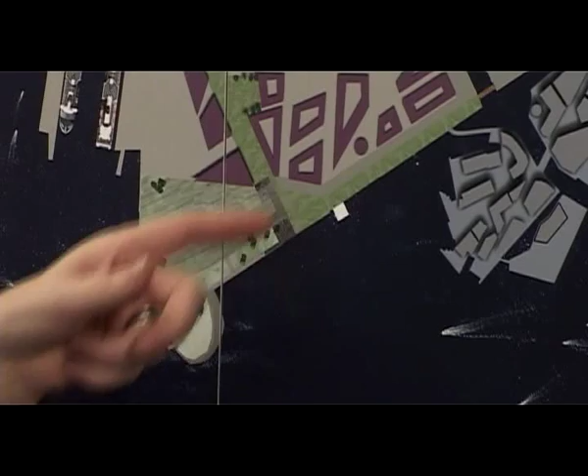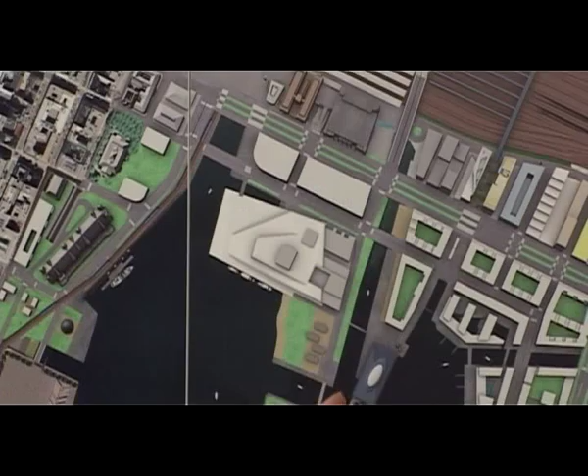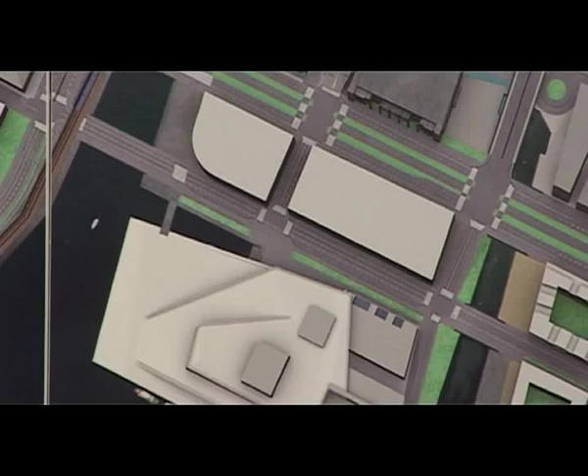A main characteristic of Oslo is also the points of land that stick into the fjord, like points of departure into the sea landscape. We are talking about a national axis of culture running from the Park of the Middle Ages, where we hope the University of Oslo will also locate a museum for the university. On the eastern side of the Akerselva River, we will reconstruct a new Munch museum, and on the other side of the river, we will have the new public library of Deichman. We are also very happy to already have the National Opera and Ballet, located and designed by Snøhetta, in this area. The main idea of the Opera House project, in the setting of the harbour in Oslo, is to transform a site which was closed to the public into an opera house which doesn't close it even further, but again opens it and gives the site back to the inhabitants of Oslo and Norway.

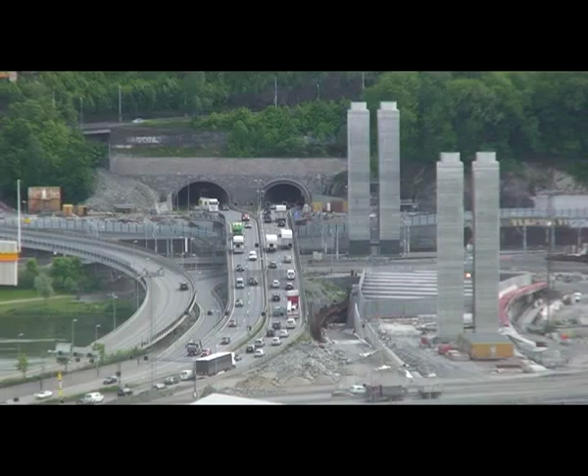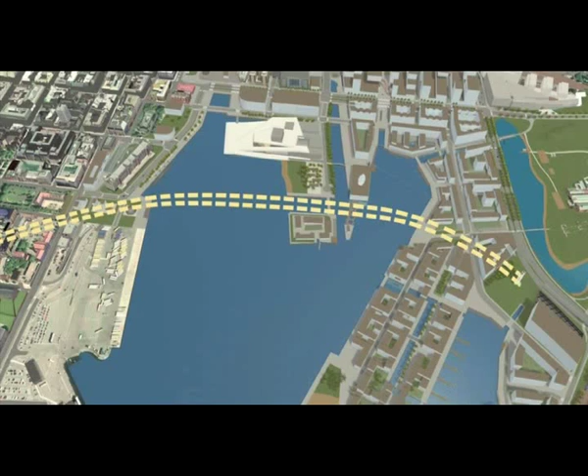The project will basically develop a central area of Oslo by realigning the existing motorway, which goes along the surface, along the fjord, down into a tunnel. We had certain choices to connect up these existing tunnels: a bridge, an immersed tunnel, or a rock tunnel. A bridge would naturally block out the fjord and dominate the area. A rock tunnel would be very deep, because the depth to rock in this area is 50 to 60 meters. So the immersed tunnel was a natural solution. When completed, it will be underneath the existing seabed.

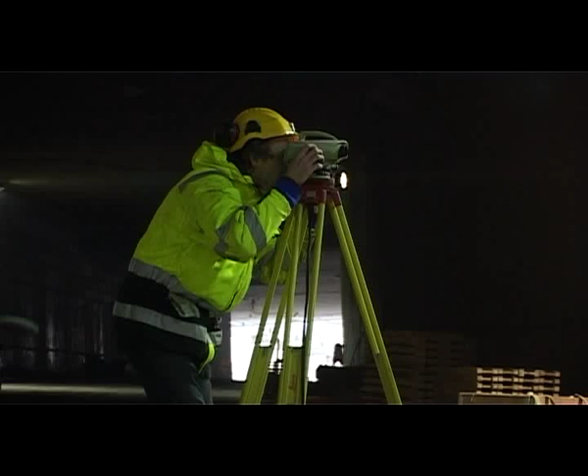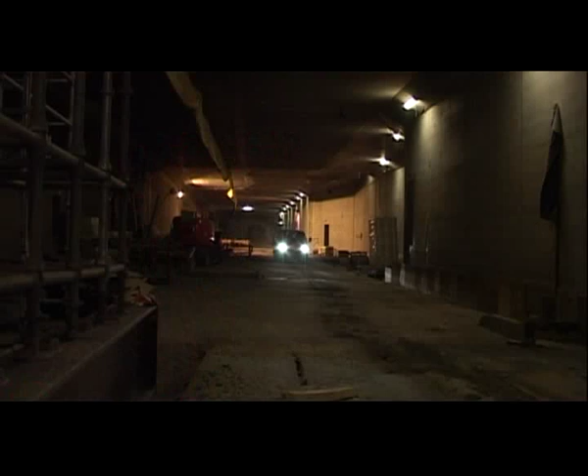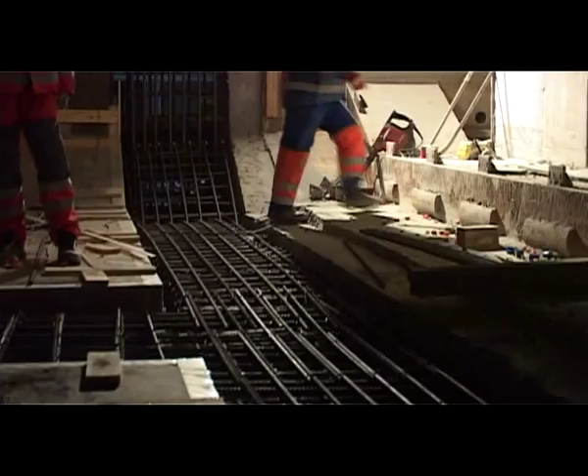We're now standing approximately 20 meters below sea level on the joint, the element joint between element number 4 and 5. From here, we have about 300 meters of tunnel in both directions. We're standing here on the joint. When the elements were immersed, there were bulkheads on either side. These have been removed, and we're now completing the structural concrete in the joint section all the way around.

We expect to find certain archaeological artifacts, because Oslo is 1,000 years old, and we hope to find interesting things. We have found interesting things. We expect to find things maybe from the Viking period.

The most important part of the artifacts are the Viking ships. It's right here under the hills of Ekeberg. We are planning to locate the museum, and our goal is to be able to display the artifacts right here in a medieval context.

One very important issue with the Opera House is that it actually falls into the water level—it dives into the water, which means you withdraw from the normal barrier between horizontal urban ground and the water level. So the building will hopefully enhance the use of water in a very close and intimate relationship between land and water.

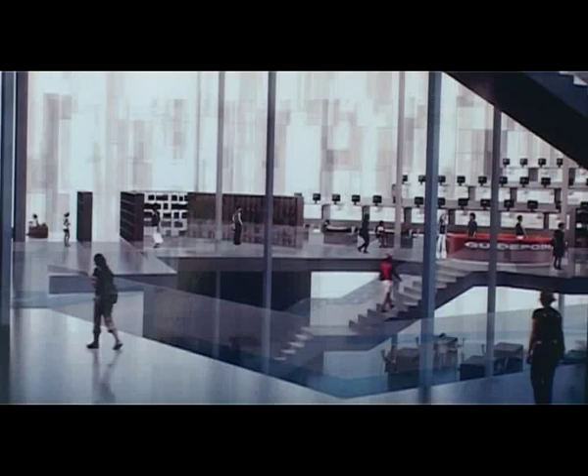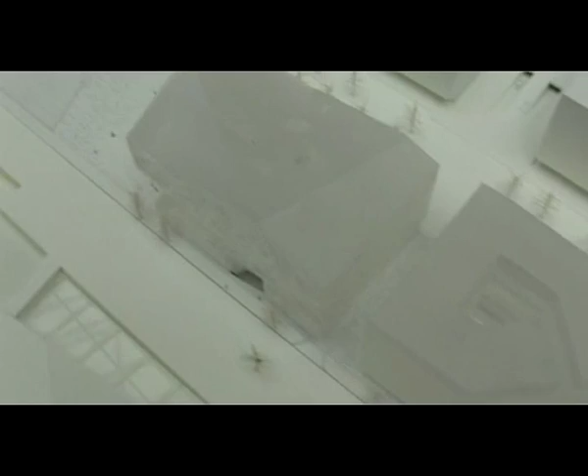I'm representing the company Lund Hagem Architects, who together with the architects of Atelier Oslo won the competition for the new library in Oslo, which we are very proud of, and we think this can be a very good building. When we turned in our project, we called it Diagonale.

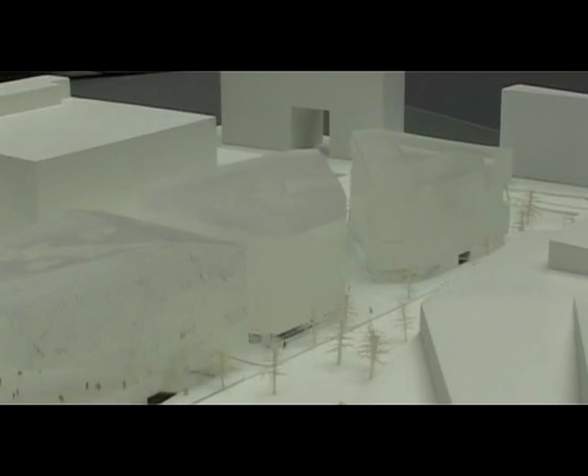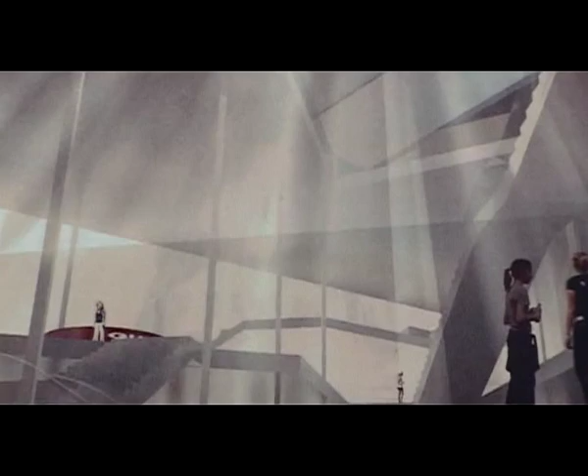The diagonal street in our city plan will give much better traffic lines for people walking in the area, and we also think about diagonal views inside the library, diagonal light coming from the ceiling and going all the way through the library in four directions, making light go through the building, but also making it possible to have contact between people inside the library and people walking out in the streets. This is very important for a public building like a library, so that people get curious about what's inside and get invited into the building.

Whether the opera is expressed in an architectural form or not is a very difficult way of defining architecture, because it would have to be analog in a sense, and our architecture is not analog in that sense. It actually operates more with the feeling that it generates within a performance, for instance. So it doesn't mean that forms or other elements are directly related to a translation of opera music.

However, I have to say the cladding on the roof of the opera house is marble, and marble is the only stone that actually has a sound. When you hit it with a hammer, it goes very beautifully, and all other stones are very plump—they don't have any sound, they don't have music. In that sense, you combine a very long-standing tradition of opera music into a modern shape.